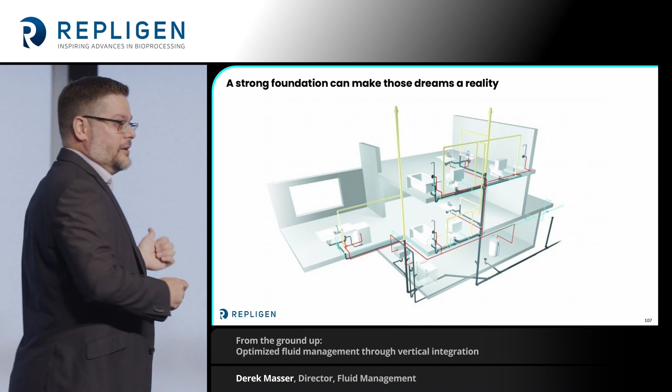But if you're shopping for that house, you don't stop there. Either you yourself or a contractor take a look at the foundation. Does the plumbing work? Is it leaking? Is there enough electricity everywhere? That, folks, is fluid management within Repligen.

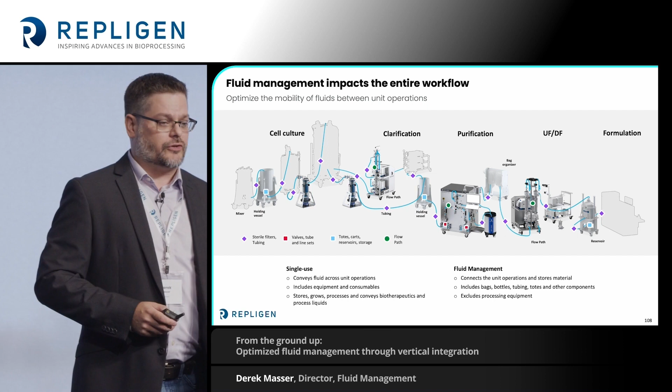We are working to optimize fluid mobility between all of those unit operations. So whether you're sterile filtering, maybe aliquoting into a bottle or a bag system for distribution around the facility, or sterile sampling from a vessel, this is what we're here to help with.

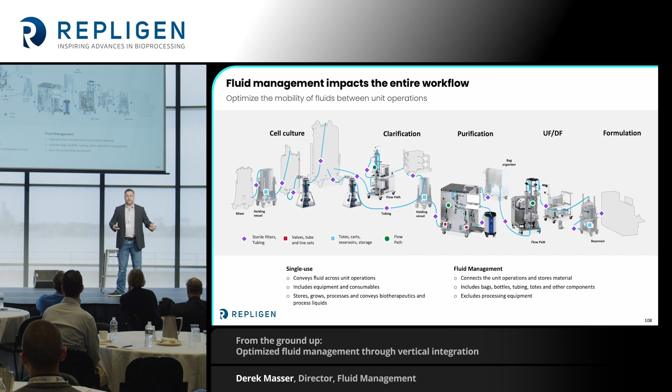Now, you probably are asking yourself, big deal, right? Aren't there 1,000 people out there putting single-use systems together? Why Repligen as well? Well, I think it starts with our problem statement here.

People have tried to address single use in the market historically. There are folks that have tried that standardized system: here's your box of Legos, this is all you can buy, red blocks, blue blocks, and brown blocks. And you put them together and configure it on your own and figure yourself out, and hopefully your process works really well.

Through that process, some other folks have tried to go the fully customized route: we make it the way you want it, there are thousands of options. So now you've got a flow path with several sources that you have to contend with, and that presents disparate risks in security of supply.

So to me and to Repligen, we're looking at ways that we're able to bring greater value to our customers, not only in the design and the figuring out of how we're going to do the single use, but then also working through vertical integration and making sure that we lock down and secure that supply chain.

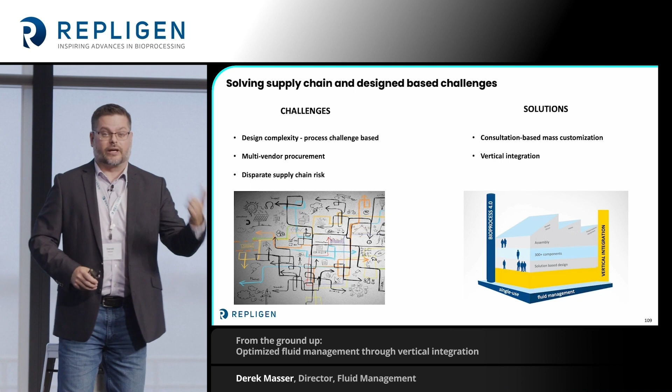So that's consultation-based mass customization. At the risk of making it sound like our team is ancient and old, the fluid management team is comprised of several individuals whose entire career has pretty much been plastics in bioprocess. We've got many years of experience working with folks across the globe to optimize their process, and figure out of the tens of thousands of options of connectors and tubing and everything else, what's the best path that makes your process the most ergonomic, most economical, and the safest.

And now we're coupling that with the vertical integration strategy. So we are bringing within our own control and supply chain some of those items that have historically been problem children for all of us that have ever bought a single-use system.

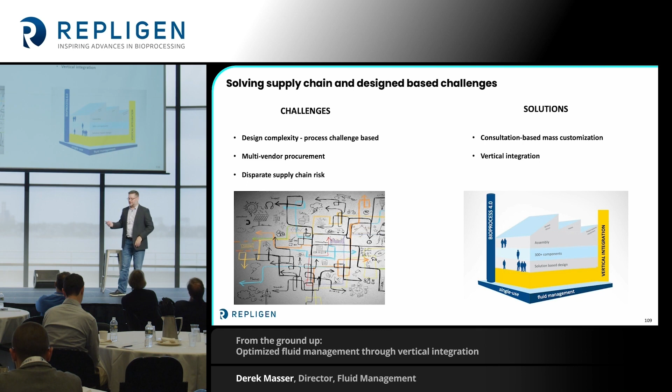So I kind of broke it down into 3 buckets. The first bucket of the fluid management group are the fluid paths themselves. So you've got things like the bottles, hollow fiber, the filters, molded and over-molded assemblies. For farther upstream processes, we're really good at putting barb and zip ties together, Oetiker clamps, making secure connections. We're also really good at over-molding silicone.

So we have an operation in Albany, New York. That's all they do. So we control that supply chain, and now we can go and work with you and say, you need an 8-bottle manifold that has aseptic connections, and this is the best way to accomplish your process.

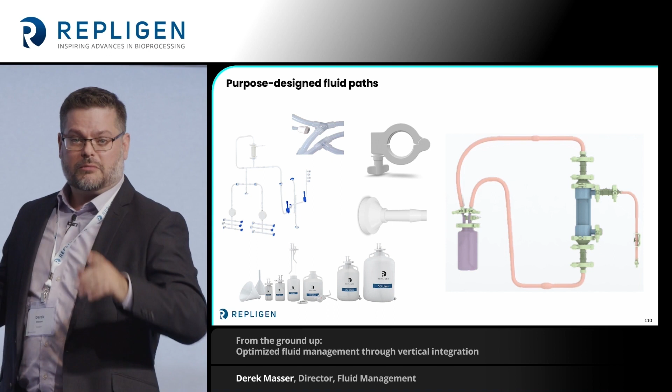If you have any experience, maybe I'll get a quick show of hands here, has anybody gotten that dreaded phone call or email from your supplier saying your process is going to be delayed because I can't ship you your single-use system because a sanitary clamp is on back order? It has happened, it happens, right?

Especially over the last two years with supply chains being what they are, and the added complexity of that, that's one more example of something that Repligen has vertically integrated into our supply chain to make sure that's not a problem for us.

So things down to sanitary to barb connections, we're not going overseas, we're not relying on someone else. We send the Repligen truck down to New Jersey and we pick up more connectors, all right?

So the end result is a fully secured, single-use flow path that, short of a crazy aseptic connector or something like that, we have a ton of security built into that supply chain.

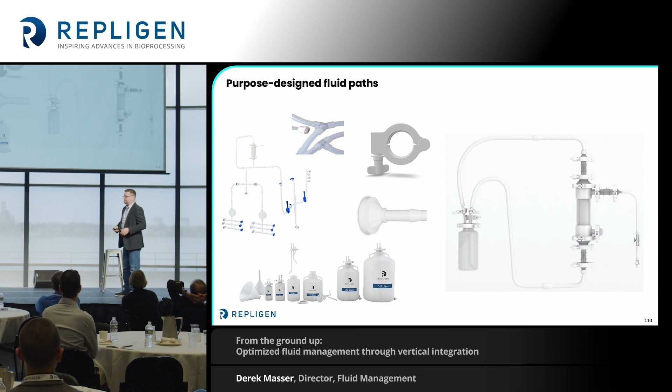As a side note, the aseptic connectors—no one has yet invented that universally mateable aseptic connector. So if anybody has a bright idea about that, please talk to me outside later on, away from the rest of the Repligen people. We're going to get rich together.

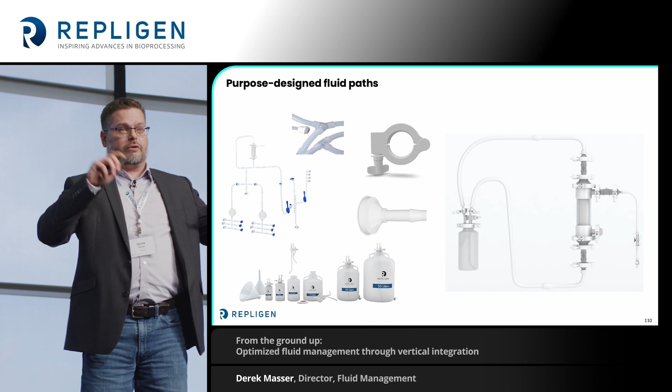So the next bucket, right? You got your flow path, you got your 8-bottle manifold. That's the way to go. How do you control the flow?

We're able to offer, again, through our vertically integrated supply chain, everything from just a manual pinch clamp, right? Simple guillotine pinch clamp, on and off, control flow.

If your process requires something with a bit more finesse, we have the manual and automatic actuated pinch valves, which have more of a gradient pinch, so you can fine-tune the flow through your process. If you're on the front side of a TFF cassette or something like that, you can really dial this in.

I'm not going to belabor that point too much because you've all heard about it on the skid, and you can see them firsthand on the chrome skid. But I do want to point out these very cool things down at the bottom.

Mr. Cates was integral in the development of these things. We call them the exoskeletons. I'm sure marketing's going to come out with a clever name eventually, but we're sticking with exos for right now. So essentially they are scaffolds that you clamp around your manifold and around the tubing.

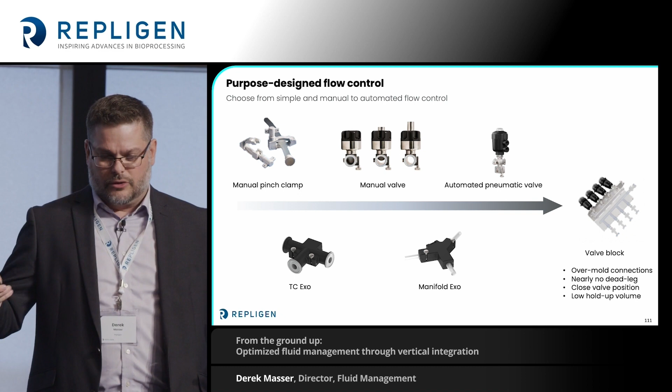So they can serve two good purposes. One, they help you manage your tube set, so you can lock it in place. You don't have to worry about your operator tripping over things or kinking a line. You can lock it in place. And these can be mounted on pretty much anything.

But another cool thing that we've done is that we've integrated these valves with these exos. And now you've got a block that you can mount or just have laying on your workbench, whatever you want. Now you have a block that can precisely control the flow through that manifold.

So you got your 8-bottle manifold. It's wonderful, it's got the Repligen silicone, it's got everything. Now you can control the flow directly by pinching immediately on those junction points. So just like Steve and the team were talking about before, no dead legs. If you're using a sterile sampling assembly, you know you're going to have a good representative pull off of your source.

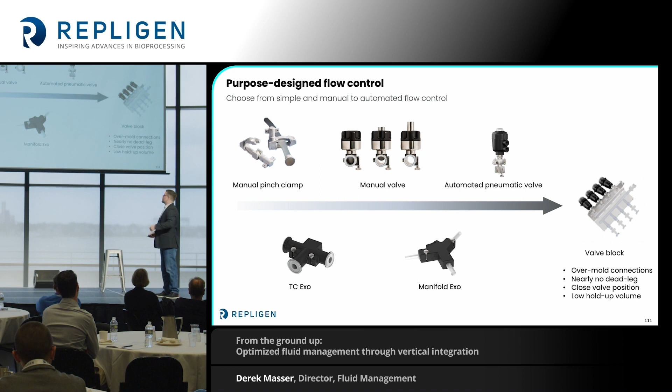And at the risk of sounding like the Billy Mays of biotech, but wait, there's more. So you've got your manifold block, you've got your 8-bottle manifold, and it's beautiful.

Now you got to sit it in your clean room, you got to work with it. You and your team have to sit there and deal with the kraken octopus that is this manifold. Where do you put it? What's the benchtop workspace look like? Where do we put the pump? I could go on forever.

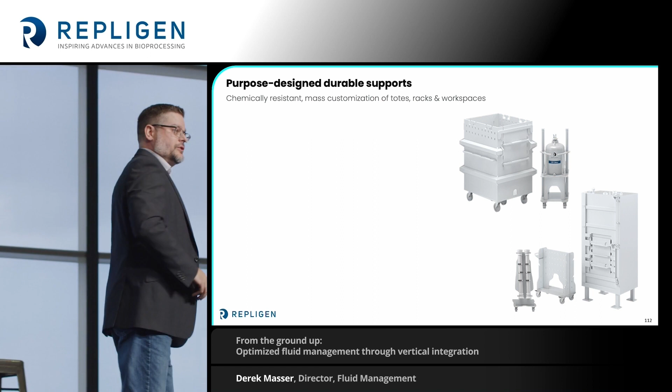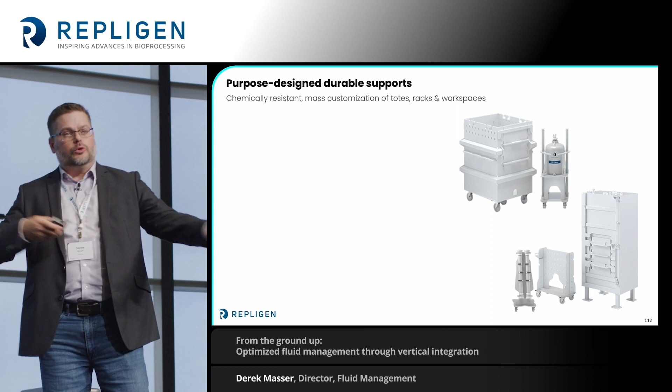We have internalized into our supply chain fabrication services of equipment that directly and purposefully support the deployment of single use. Beyond that skid, moving fluid between those unit operations, we'll build everything from bag totes, bottle carts, filter racks, you name it. Our manufacturing format, everything can be customized. If we can design it in SolidWorks, we can build it in real life.

So the next thing people usually say is, yeah Derek, that's great, but why polypropylene? Well, it's wonderfully chemically inert. You can hit it with Spor-Klenz, Vesphene. I've got customers heating bleach and spraying them down with bleach. Do your worst - these things look as good three years from the day you bought them as the day you bought them. You can color code it. The polypropylene gives us the ability to create geometries that stainless steel simply doesn't afford.

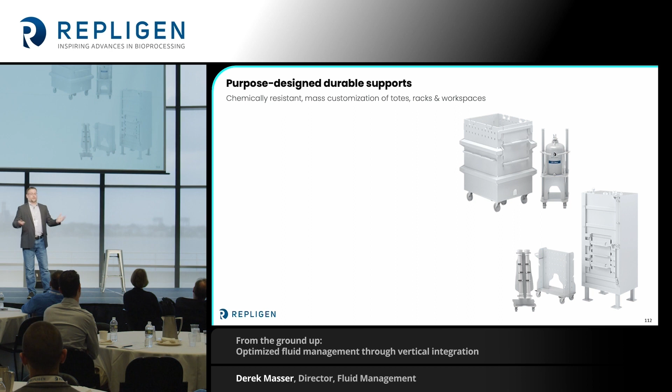So the next concern is, yeah Derek, but it's plastic - it's gonna crack, it's not as strong as stainless steel. But you would be wrong. This is a 3,000 liter bag tote. Polypropylene has all the strengths of steel, it's wonderful, and it's cleanable. You don't have to worry about rouging or rusting, and we can incorporate fancy things like overhead radar for level sensing. If you want to go the old school route of load cells, we can do that too.

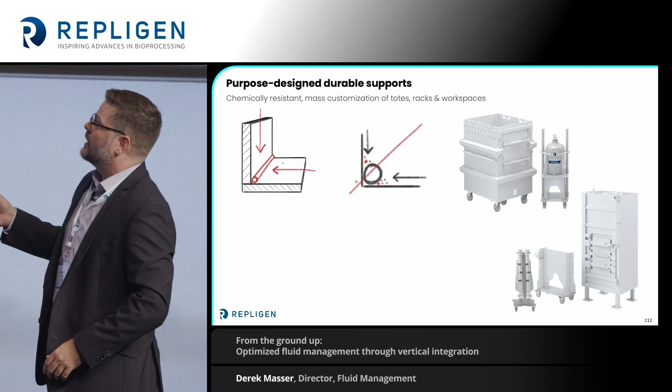So how do we make it strong? Traditional plastic fabrication: you take two pieces of plastic, put them together, run a piece of weld rod down the seam. It makes something that doesn't leak, and it looks pretty. But the problem is you still have two separate pieces of plastic, and that's a heck of a place for bacteria - if you get a growth media leak or something, it's tough to clean. You really have to get in there.

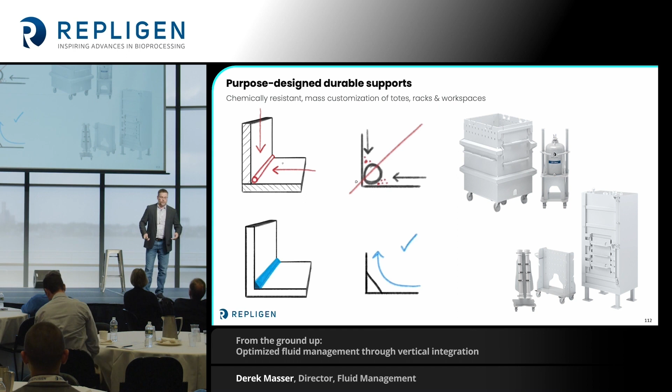So what we've developed is a fusion technology for making the welds on these big pieces of equipment, where we essentially join those two pieces so now they are one. But also, the weld rod that reinforces that also creates a baby's-bottom-smooth junction. So now, when you want to wipe it down or clean between your units or batches, it's not a problem - it's very, very easy to do.

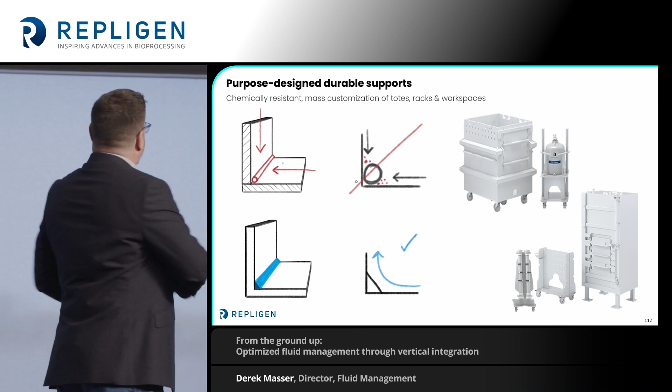So finally, a quick, small case study. We had a customer come to us and say, we have a filtration process we want to deploy, and we want to build a manifold of 12 filters - 12 pre-filters manifolded in there - and we don't know how to handle it. So initially we worked with them to build both the assembly of a flow path and couple that with a filter racking system to help their operators manage a behemoth like a 24 filter manifold. Just to give you a sense of scale, those are 30 inches and those are 24 inches - they're not small filters. So we designed the rack, everything's great.

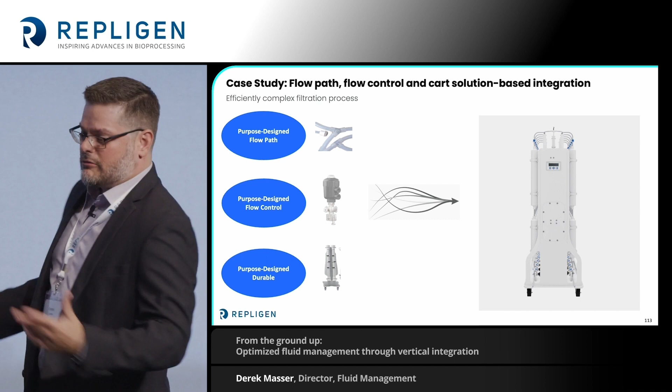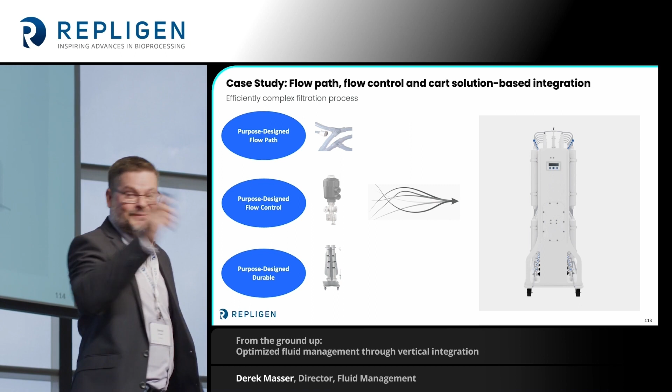And they said, you know what, why don't we take it a step further and control that flow? So we integrated the Repligen pinch clamps, the pneumatic pinch clamps, with all the air lines tied into the main vessel. It essentially has what we call a dummy skid - there's no controls, no logic on the skid, but it's essentially a connection point. The customer can route that through their existing DeltaV in their own process or facility, put together their recipe and process, and now what was a menagerie of tubing and filters - what was just a simple filter rack - has turned into quite a clever piece of equipment where they essentially hit the play button and run their filtration process.